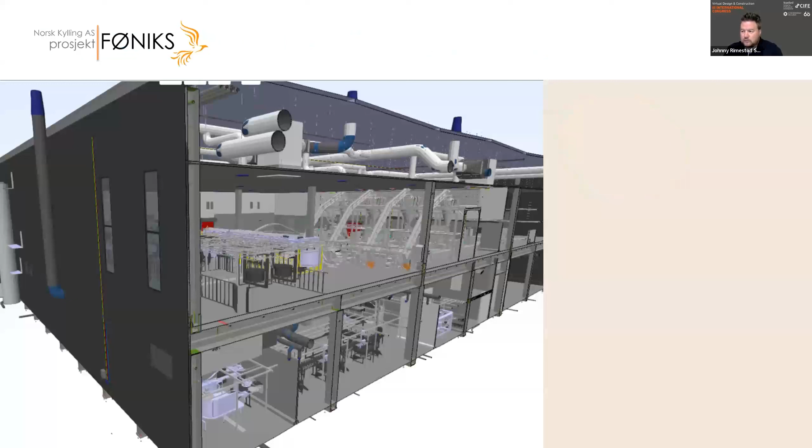We called this project Project Phoenix. It's one of the biggest greenfield poultry factories ever built in Norway, and it's a 2-story production building, which has never been done before because most food processing plants take place on one story or one level.

So here they wanted to save area and have production line equipment on 2 stories on top of each other. That led to a lot of new and other types of challenges to solve since it's never been done before.

Speaking of the objectives the client wanted at the start of the project, they wanted to be the best in the world. They wanted the highest quality of white meat and the lowest prices in Norway, and they wanted to develop world-leading solutions for energy and CO2 emission, animal welfare, and so on. Extremely ambitious objectives from the client when we came into the project.

As you can see, these objectives don't contain any targets or numbers that we can use to produce metrics to see if we're on course. They're really just saying we want to be the best, and have the highest and lowest.

So one challenge coming into the project was how we could contribute to achieving the client's objectives with limited influence in the project. The organizational map consisted of, I think, 13 or 14 sub-projects or sub-organizations. I was hired for the building design team, and we were only there to design the building itself, not the machines and equipment or anything else, just the building and the technical systems supporting the processing equipment inside.

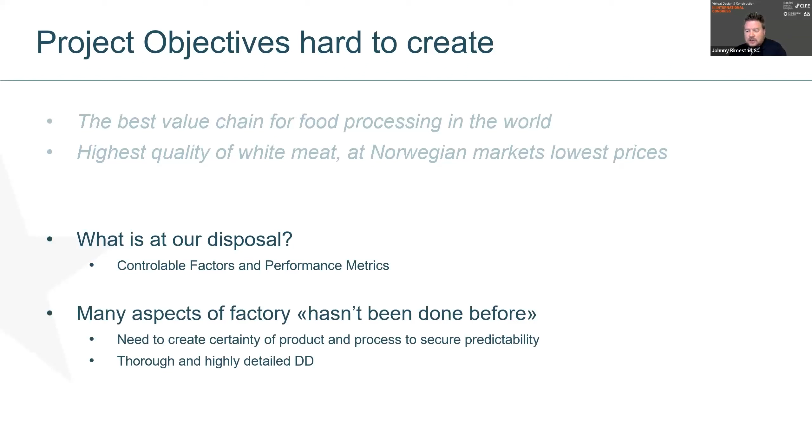The factory hadn't been done before, so we needed to create certainty of product and process to secure that this project was actually buildable. That required a thorough and highly detailed design development stage.

I'm not going into detail on the design development stage. I'll just show you a summary of it with what we call a 5D light, which consists of 3D geometry in BIM connected to schedule activities, connected to cost estimation. What I really want to show is what we did further on in the project.

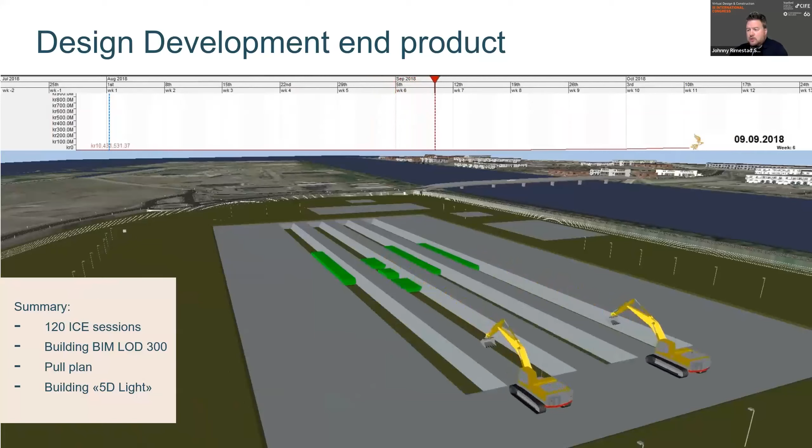In the design development stage, we ran 120 ICE sessions. We actually modeled the entire factory building and supporting MEP systems in BIM to an LOD 300. We used pull planning, and then created a 5D light as we went through the entire design, trying to figure out how to build this complex project.

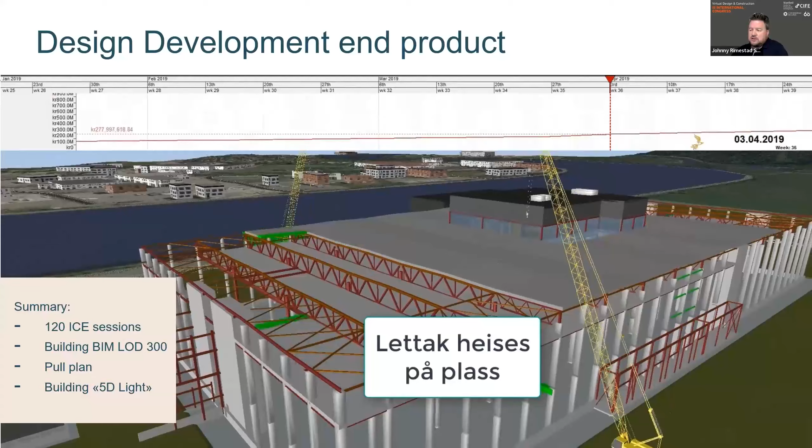So what you see is basically how we get a tight building envelope, and it's waterproofed. What you saw is a lot of building design stuff, walls, foundations and columns, but very little of machines and equipment. So basically we designed an empty shell. That was our task in our sub project. We were there to design the building and the supporting technical systems for electrical, plumbing, ventilation, and cooling, and so on.

However, in the design development, the end product, the CEO of the company, the client, they were really pleased with the result, and they said this 5D light presentation offered a precise, quick, and to the point message, which had a massive impact on such a complex project because there were so many stakeholders, and not many of those were used to reading construction documents or time schedules and so on. So this just really gave them 2 years of construction shown in 2 minutes. It was easy for them to understand. So that was what we did through the design development stage, among other things.

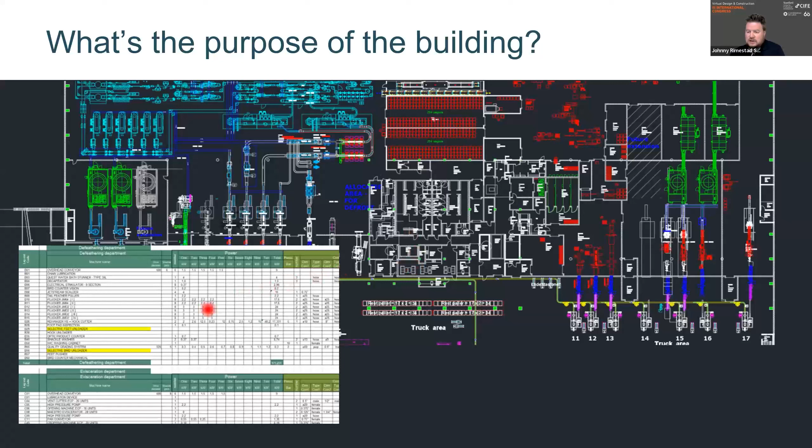It was quite challenging trying to understand both geometry and utility. All the machine suppliers handed in what we call a utility list, which is meant to have the name and number of the machines, which you are supposed to find in this drawing, and of course connect it to a data sheet they also sent. However, the biggest challenge is that the name of this machine is not always the same name used in this list, and the name on the data sheet is not the same either.

So it's full of contradictions, hard to understand. And also some countries and suppliers use metric units, others not. Some use PSI for pressure, others use bar, and so on. So there was a lot of confusion with units, and it was hard to design the mechanical systems for this project because we couldn't see and we couldn't understand.

There's zero information, so it's basically not a building information model. The file sizes are extremely big. Most suppliers won't even share their files because these are files made for production, meaning these files are made to actually build the machines. So they are 1:1 ratio.

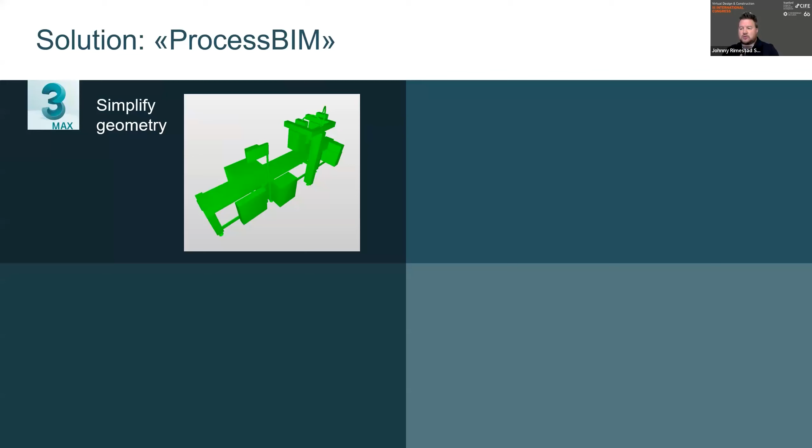So what we did, we created a solution. This is a short version. We took the 3D files from the suppliers and simplified the geometry, so we took away everything that we didn't need to design the building to support this machine. Nuts and bolts and all small details were just taken away. What we wanted is the outer geometry to see the geometry in X, Y, and Z, and basically where there are windows, where there are air, and where you cannot go.

We also standardized this utility list where people fill out the need for utility for this machine. All suppliers needed to fill out the same list. They could not come with their own sheets; they needed to fill it out in the standardized way. We also had workshops, and we created 3D symbols that we connected to these machines to say where do we connect cold water, where do we connect electrical power, and so on.

The biggest thing which made the biggest impact is we did this and we merged everything into one file. We merged the simplified geometry, the information from the utility list, and the connection points, and created everything into one BIM file.

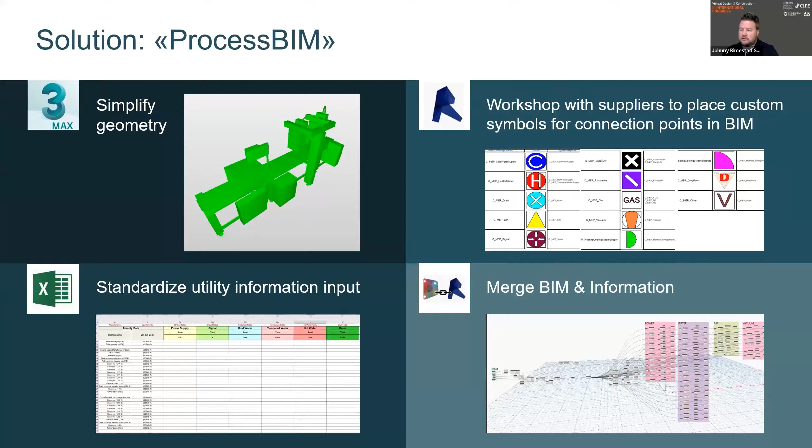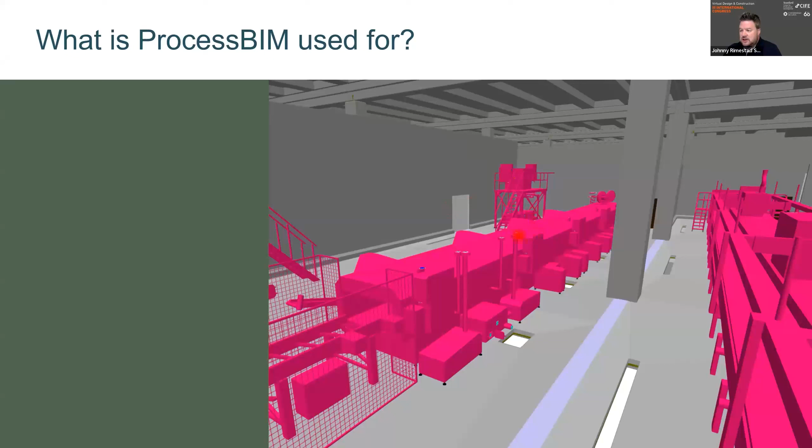So what did we use this process BIM for? We called this process BIM basically because it's BIM for the processing equipment - the end result where you have geometry, utility information, and connection points. So here you see some machines and you can see the connection points over here.

The process BIM was actually used as a contractual design basis for the MEP contractors. We worked for the client and created Revit files and IFC files that we gave to all of the contractors, clients, and engineers in this project. So they could just link this into their Revit models and model the utility supply. In this case, we knew that everything was taken care of - we knew all the utilities, and they could design the system so it actually supported what was needed.

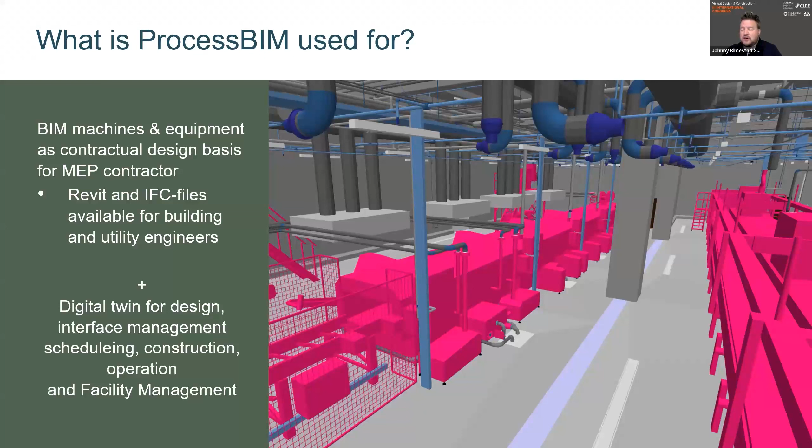We did this for the design phase, but it turned out this was a great tool for interface management, scheduling, construction, and also now in operations and facility management. We visited the factory 2 months ago and they say they still use BIMsync, still use all these files, and open the BIM every day because it's a big factory. Whenever they wonder something during operations or facility management, instead of walking 20 minutes, they open the BIM and go directly to see exactly what they need to see and all the information that goes with it.

I also want to show an example of how we could integrate information through BIM, because between the stories we found 7,700 BIM objects, and we needed to find which ones needed voids or core drillings, etc. That was a big challenge because not all of these BIM objects needed core drilling. So how could we use BIM to find out what to cut out?

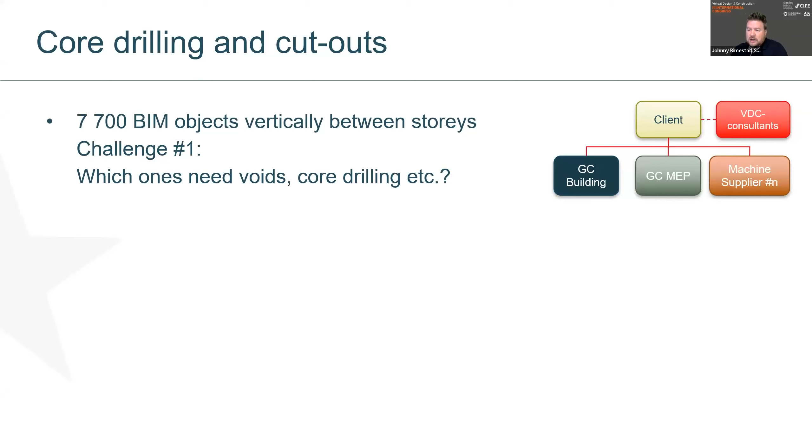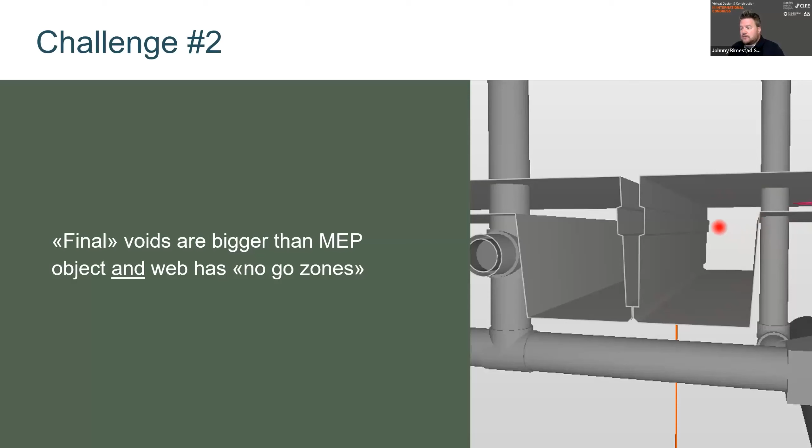So how can we find clashes that are not there yet? That was one of the biggest challenges.

Third challenge is that basically any opening in this structural floor represents a risk for the client. It represented a hygienic risk because if there was a leakage or containment issue between stories, worst case they had to shut down production, which would lead to a lot of time and schedule costs. The operation cost of a hygienic breach is extremely high, so we also needed to keep the number of voids to a minimum.

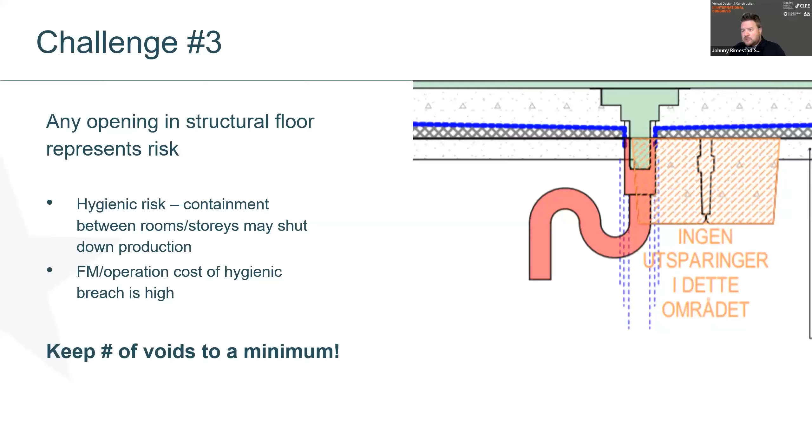So those were our three challenges. And we came up with a solution for this problem using the VDC framework.

We used Dynamo, which is a visual programming tool, to identify all BIM objects that penetrated the concrete. Then we exported it as a spreadsheet Excel file, which the people responsible for these voids could enrich with metadata—this object needs this tolerance, it has to have fire protection, it needs this, it needs that. It was all listed in a spreadsheet and the responsible people filled it out.

Then we took that file, turned it back into BIM, and used visual programming through Dynamo and Solibri to create new BIM objects showing the actual size of the core drilling. With this, we can run new clash detections to show this is going to be a problem. When we ran the clash detection, it would not give us a clash now, but when we look into the future, it will give a clash. That was a great discovery for us using this method.

We also used these BIM objects to collect coordinates so we could do surveying and layout directly from the BIM with the openings, and they did so on site.

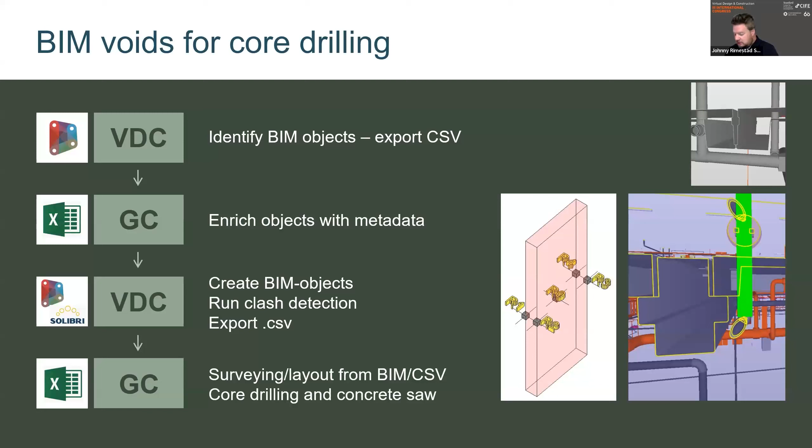I just took one of the screenshots of the BIM objects that we created. So we found 526 needs for voids. We were able to collect them and create shared voids, ending up with 366. Just one of these was misplaced—actually, not misplaced, it turned out someone had changed some of the design after we sent out the survey coordinates. But basically there were zero errors from this, and the people involved said that never happened before in any industrial project.

And you can see they're so rich and full of metadata—what file does this come from, what are the revision dates. Yeah, a lot of metadata coming in with these files.

So I want to show you what we call the process BIM, which is the processing equipment in 3D with information and connection points. Combining that with these automatically created voids, we could have a whole other level of coordination.

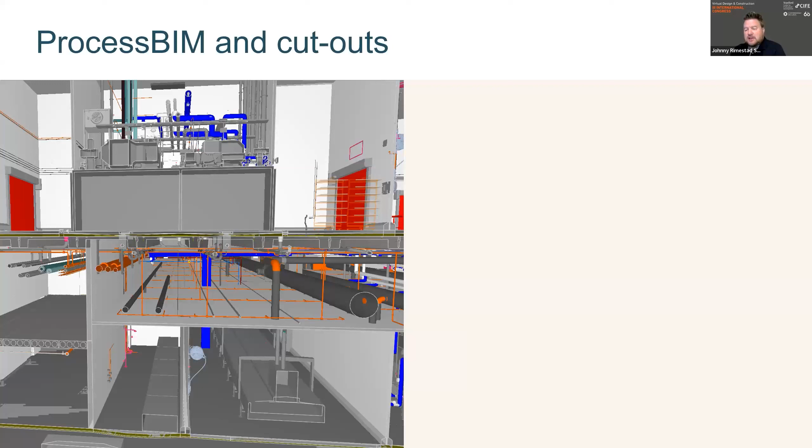It would have effect on the schedule and cost. And if we did not use VDC, did not have process BIM, and did not have voids, we would not discover this until basically the machines arrived and we saw there was no place for this. Then we would need to come up with a solution that no one really liked.

If you look at the people that would be involved in finding a solution if this is too late, you look at the general contractor for mechanical, electrical, and plumbing, the client side, the general contractor for the building, and also the machine supplier. Now, every one of these need to talk together to find the best way to place these machines after we already have done a lot of design and coordination work.

As you can see, this would be time consuming, both in terms of the calendar and schedule, but also hours, suboptimal design, and a lot of change orders and extra costs for the client.

Since we actually were able to detect this at an early stage and give notice to the supplier of this machine, they were now, on a contractual basis, ordered to redesign their machines internally so that they could move the wastewater outlet so it didn't clash with the webs of the structural floor.

So if you just think of how much this potential error could cost the client, and how many other similar issues like this would appear in the project, you can imagine the cost and time impact that would have. But since we already fixed it, there was no cost for anyone involved except for the machine supplier that didn't pay attention.

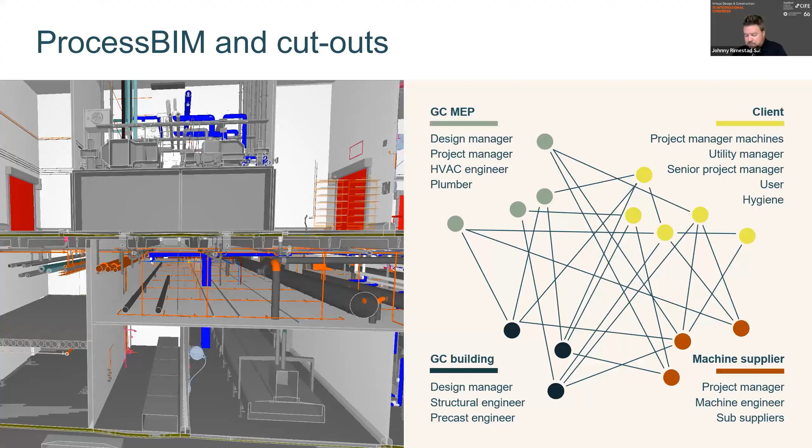So when the project was over, the client claimed they achieved all of their client objectives. And if you look at it through the criteria of a high performing building, a building needs to have objectives and criteria for how it is to be used, how it is to operate, build, and whether it's sustainable.

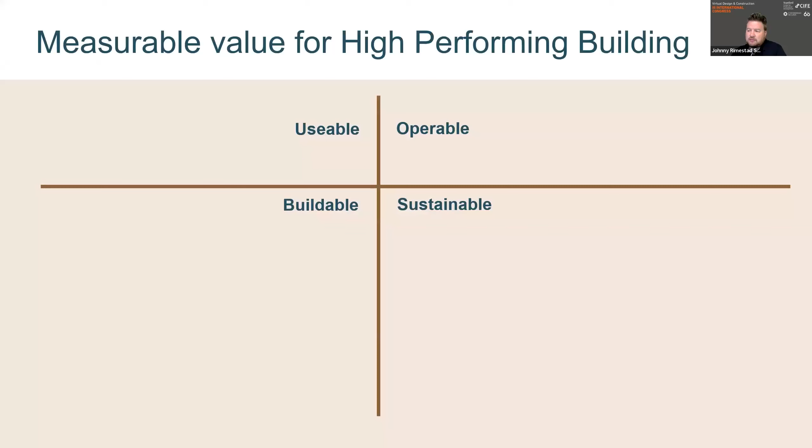These were not objectives that we had before we started the project, but if we now look at it in retrospect, you see that the project is a sustainable project. They've done a lot of innovation within energy, agriculture, and animal welfare. They actually produced white meat of the highest quality at the lowest price on the market.

They have zero CO2 emissions in operation, and a lot of awards they have won. For me, one of the biggest things that happened in the project, is that they actually came in on schedule.

They were actually 2 months ahead of schedule by March 2020, when COVID hit Norway at full impact. So they lost 2 months due to COVID, but that was basically from trying to figure out how to work from then on.

They did a lot of work on Microsoft Teams or Zoom, and they were extremely dependent on the process BIM and all the BIM tools and everything they had, because they basically had a digital twin of the product they were designing.

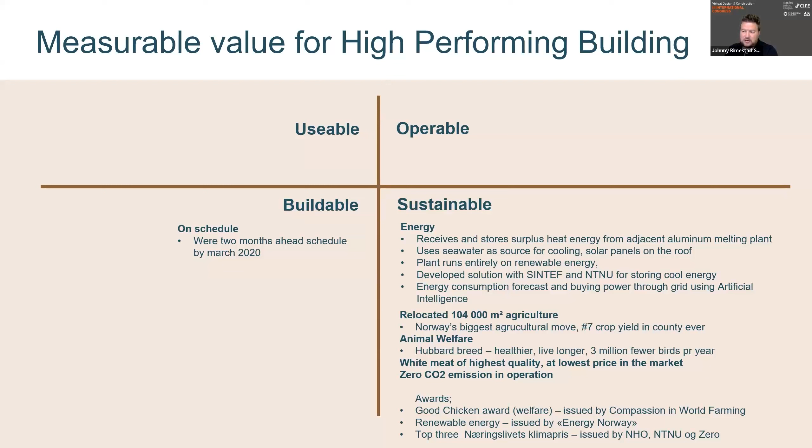They were actually also under budget because the good coordination in the project led to zero to none change orders. So they had a 10% contingency in their plan, and they were able to use it to create an even better building as they went along.

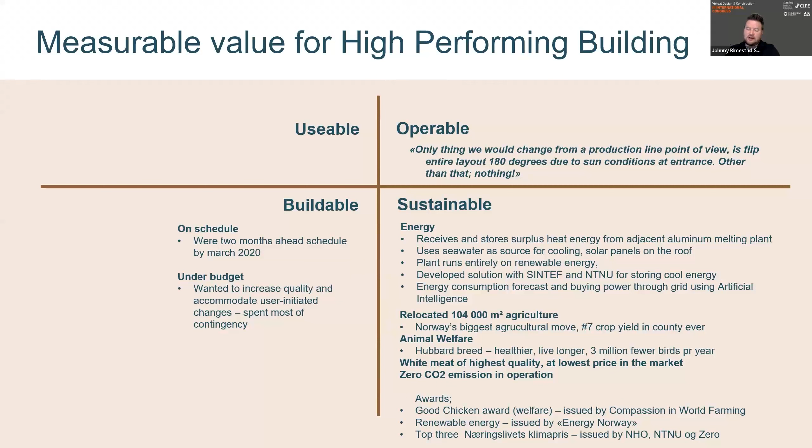During our visit to the plant, we asked, do you have any regrets about this project? What would you do if you were to do it again? And they actually said nothing, because since we had everything so visualized, there's not one thing that we would change, except flipping the entire layout 180 degrees due to the sun conditions at the entrance. But everything inside it was exactly what they wanted and needed.

So the CEO of the project said this is nothing short of unique, coming in on time and under budget.

And 10 to 15% over budget is not unusual. Other projects actually went 40% over budget. So this was quite extreme.

So we asked the key personnel in the project for the success factors. And when you look at those, they basically sum up things that we do with VDC. What was crucial to be on time and under budget is basically controllable factors: right people, right technology, deciding to work on thorough design development. And we would not be able to do this without the BIM process.

Even if you can apply VDC partially, it can help secure massive value for your clients. So I think I will stop there. I had a lot more, but I spent too much time talking, so I would stop sharing the screen.

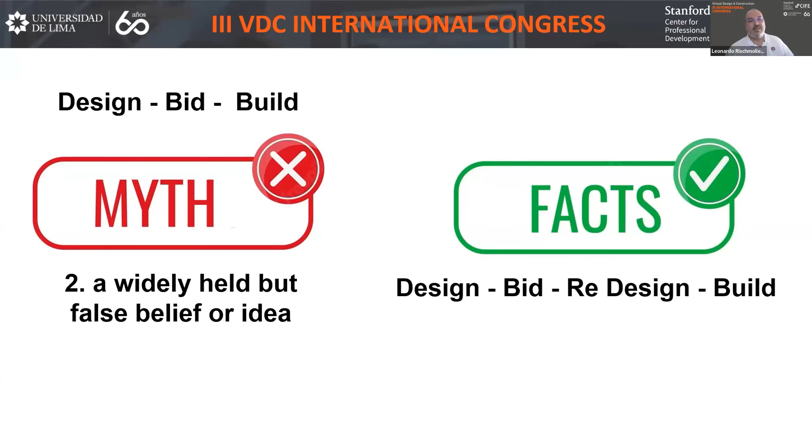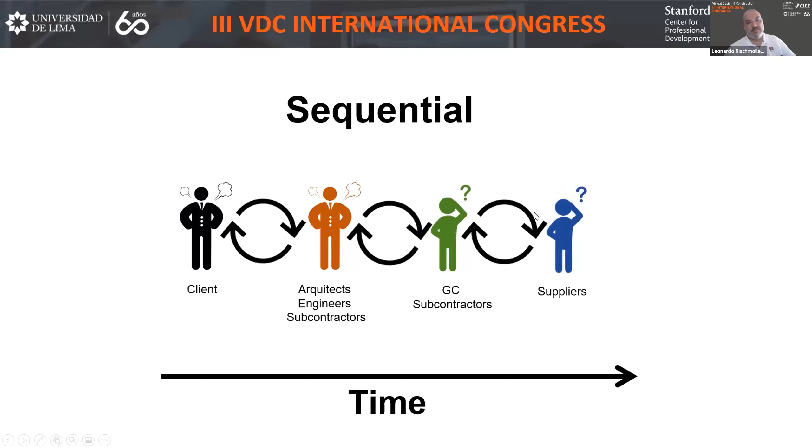Este proceso de diseño, licitación, construcción, o diseño, licitación, rediseño, construcción, tiene una característica importante: es un proceso secuencial. Tenemos a los arquitectos e ingenieros haciendo el diseño y solo cuando este está terminado pasan los planos al constructor. Pero la secuencia es más grande: tenemos al cliente, quien contrata a los diseñadores, y a los constructores, quienes contratan a los proveedores. Y además, en realidad, no es tan secuencial como se pensaría, sino que hay muchos loops de intercambio de información en cada una de las etapas, igualmente secuenciales.

Lo opuesto a secuencial es el trabajo concurrente. Lo ideal sería que, en lugar de esperar a que una de las instancias produzca la información, como planos, trabajar todos juntos en la creación de la información, de modo que no haya esta instancia de interacción en la cual tenemos que preguntar qué quisiste decir, hay un error, no entiendo, a través de los RFIs y las órdenes de cambio.

Entonces, lo opuesto al trabajo secuencial es el trabajo concurrente, y el trabajo concurrente no necesariamente es entre los actores que se ven en este slide, sino entre diferentes actores de acuerdo a la etapa de desarrollo en que se encuentra el proyecto.

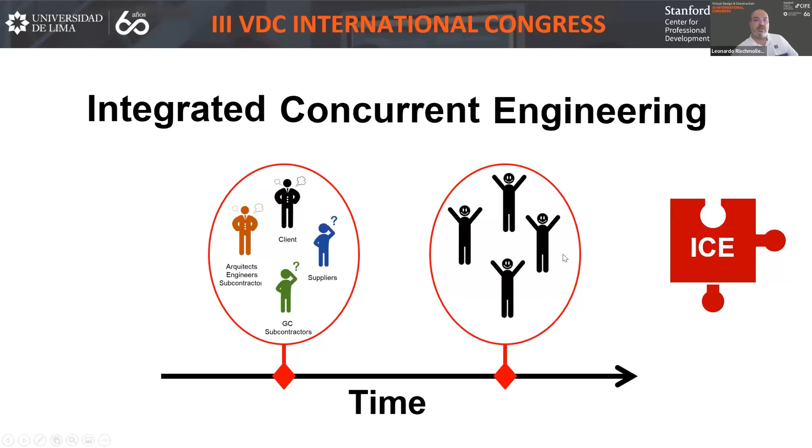Dentro del esquema, framework o metodología VDC, llamamos a este trabajo concurrente Integrated Concurrent Engineering, o ICE. Entonces, ICE es una pieza fundamental de este rompecabezas VDC que se refiere al trabajo concurrente de diversos actores en las diferentes etapas de desarrollo del proyecto. Así que tenemos una pieza de este puzzle de VDC.

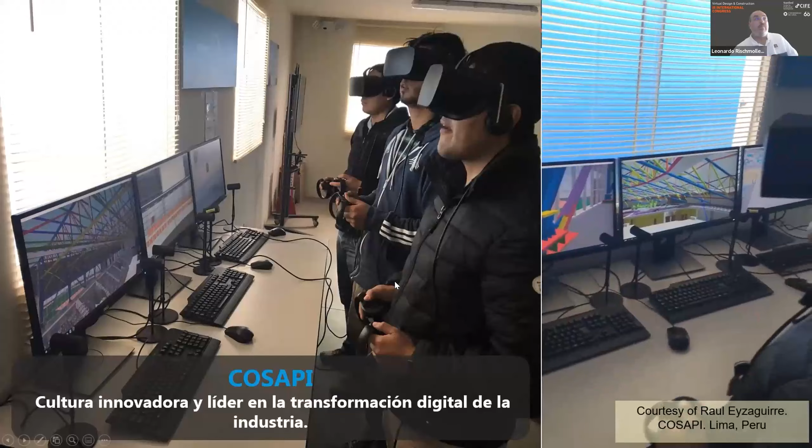La ingeniería concurrente integrada usa, no necesariamente pero prácticamente en la mayoría de los casos, Building Information Modeling. BIM es hoy en día algo común en la forma de diseñar los proyectos. Ya el AutoCAD quedó atrás, y hoy en día no hay proyecto que no se diseñe usando BIM en la mayoría de lugares del mundo. Pero BIM de forma aislada no es suficiente.

Hablamos de ingeniería concurrente integrada, en donde de manera concurrente diferentes actores, dependiendo de la etapa de desarrollo del proyecto, se reúnen para trabajar en la toma de decisiones, en la planificación y muchas otras actividades, utilizando la modelación BIM, pero también la metodología de ingeniería concurrente integrada en sesiones ICE. Estas sesiones, a propósito del trabajo híbrido, pueden llevarse a cabo de manera presencial, como se ve aquí, o de manera virtual.

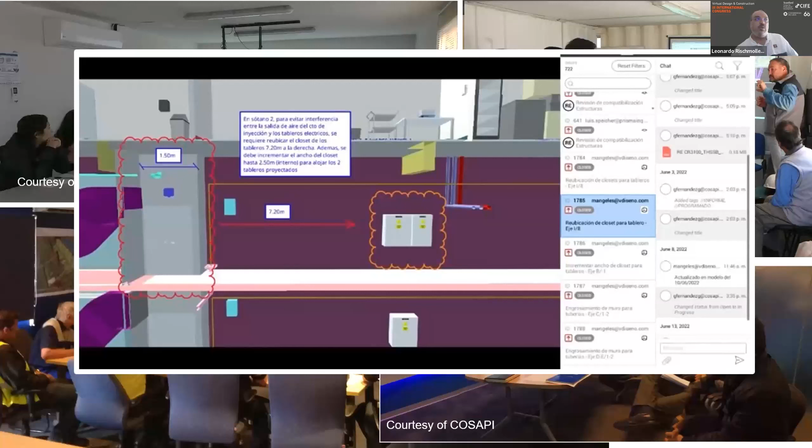Utilizando diferentes herramientas comerciales disponibles para ser adquiridas, en las cuales, en el caso de la herramienta que estamos viendo en pantalla, tenemos una parte de la pantalla con un chat tipo WhatsApp, y en la otra parte, en tiempo real, estamos visualizando los modelos BIM de todos los modeladores que suben sus modelos a las nubes y pueden ver la interacción de estos con las otras disciplinas.

Otra pieza de este rompecabezas VDC es PPM, que significa Project Production Management. Es la aplicación de la ciencia de operaciones a los proyectos, y fue desarrollado por el Project Production Institute. La ciencia de operaciones es la ciencia de los proyectos. Un mejor entendimiento de las ciencias de operaciones lleva a mejores operaciones y a empresas más exitosas.

Algunas de las cosas que se ven cuando uno se involucra en Project Production Management son los procesos de demanda, la utilización de recursos, la variabilidad debido a la aleatoriedad o falta de información, temas de sincronización y contingencias, trabajo en proceso, tiempos de ciclo, productividad, stocks, etc.

En términos simples, cuando trabajamos en la oficina tratamos de determinar qué y cuándo deberían hacerse las cosas, y esto responde a lo que conocemos como Project Management. El Project Management está fundamentalmente enfocado en qué se debe hacer, a través del alcance, y cuándo, a través del cronograma. Algunas veces también, a muy alto nivel, la utilización de recursos.

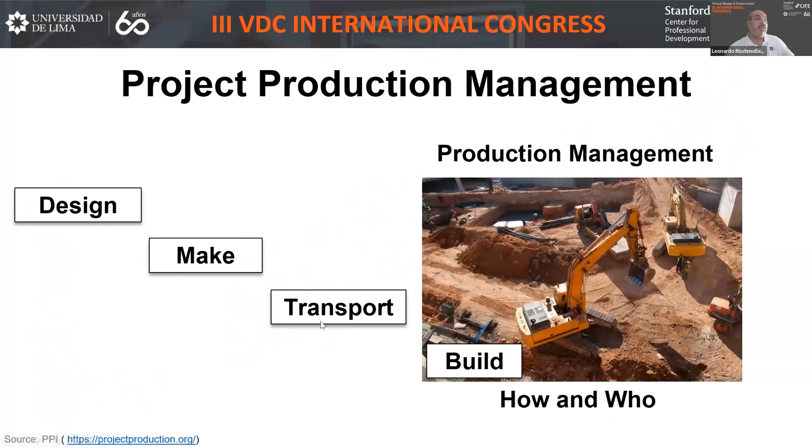Y cuando hablamos de Project Production Management, a pesar de que yo he presentado esto con foco en la construcción misma, en la operación, en realidad el Project Production Institute propone que hay 4 verbos con los cuales debemos lidiar: el diseño, la realización o fabricación, el transporte y la construcción.

Entonces, esto es lo que vemos dentro de Project Production Management como parte del VDC, además de 5 palancas importantes, que son el diseño del producto, el diseño del proceso, en donde lidiamos con el cómo, la capacidad, el inventario y la variabilidad.

Dos piezas más de este rompecabezas o puzzle VDC son los objetivos del proyecto y los objetivos del cliente. Muchas veces podríamos pensar que estos dos objetivos están siempre alineados, porque tendemos a pensar que el cliente lo que quiere es su proyecto a tiempo, dentro del presupuesto, con la calidad adecuada y sin ningún accidente, lo cual es cierto. Pero si vamos más profundamente dentro de lo que quiere el cliente, muchas veces encontramos que además del costo, el presupuesto, la calidad y la seguridad, los clientes tienen demandas específicas que debemos alinear con los objetivos del proyecto.

Para eso les voy a compartir un ejemplo de este proyecto en la ciudad de Lima, llevado a cabo por la empresa COSAPI. En este proyecto se está utilizando el rompecabezas o marco VDC. Yo quiero representar esto como un marco de gestión de proyectos que aprovecha lo mejor de todas las metodologías y herramientas disponibles: lo mejor de la tecnología y de las herramientas BIM, pero también lo mejor de metodologías Lean Construction a través de Project Production Management, y rescata lo mejor de las principales metodologías de gestión de proyectos, como aquellas propuestas por el PMI en su PMBOK.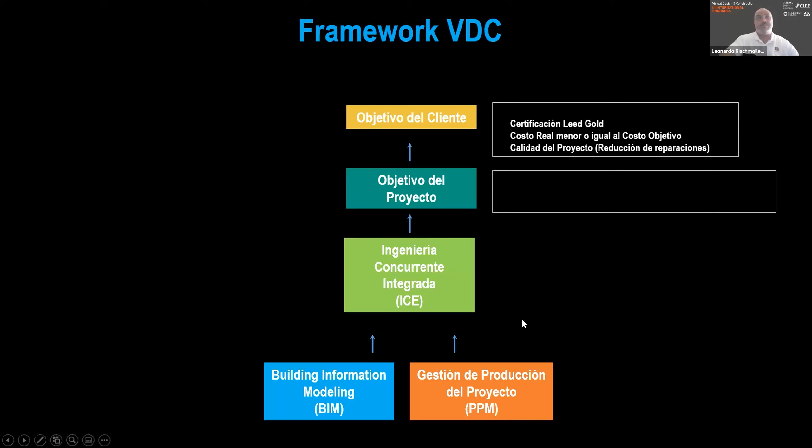Entonces, cuando hay un trabajo concurrente entre el equipo del proyecto y el equipo del cliente, se puede establecer una colaboración, una comunicación y una conversación que permita alinear el objetivo del proyecto con el objetivo del cliente, e ir más allá de pensar que el objetivo del proyecto es solamente acabar en plazo y presupuesto con calidad y seguridad. En este caso particular, obviamente, uno de los objetivos del proyecto es acabar dentro del costo objetivo o el menor costo real. Pero en ningún momento en el caso de los objetivos del cliente hemos visto todavía temas relacionados al plazo.

El cliente lo que necesita es tener aulas operativas antes de que empiecen las clases en el ciclo 2022, en el segundo semestre del año 2022. Cuando uno realmente conoce los objetivos del cliente, entonces puede trazar objetivos del proyecto alineados con los objetivos del cliente. En este caso, ¿qué pasó? En este caso, entregar aulas

Operativas para cuando el cliente las necesita. No es necesario entregar el edificio completo. Este edificio tiene no solamente aulas, sino tiene ambientes para otro tipo de uso. El cliente, sin embargo, lo que necesitaba prioritariamente eran las aulas. Entonces, al trabajar de una manera concurrente y coordinar con él, podemos determinar entonces que el objetivo del proyecto principal va a ser entregar las aulas en los pisos 4 y 5.

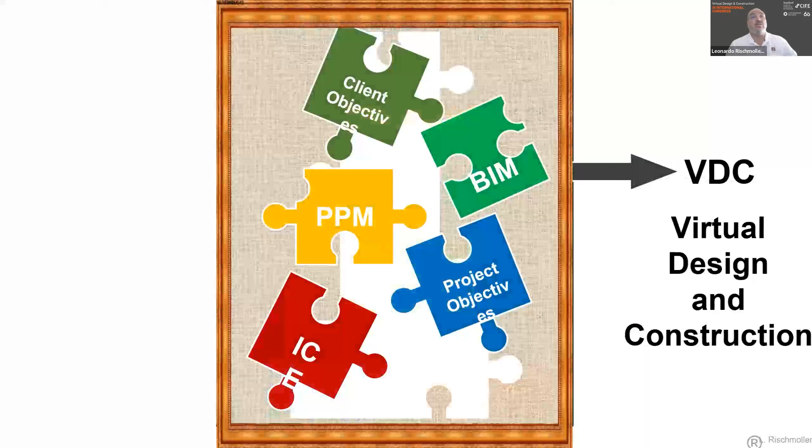Así que eso espero que sirva como base para lo que sigue en estos 3 días, y estemos todos alineados cuando hablemos de VDC, sepamos de qué estamos hablando. Muchas gracias.

Bueno, muchas gracias, ingeniero Rischmoller. Excelente presentación en la cual pudo comparar cómo es la diferencia, ¿no?, entre la teoría y la práctica real en los proyectos de construcción. Y bueno, explicando en el proceso el rompecabezas del VDC y su aplicación en un proyecto, ¿no?, de la constructora COSAPI. La pregunta nos las han dejado por el chat. ¿Cuál sería, en su opinión, la mejor estrategia para poder introducir VDC?

Lamentablemente, no voy a poder responder esa pregunta, porque dependiendo del grado de madurez que cada empresa tenga en el uso de herramientas BIM, por ejemplo, o de la etapa en la cual se encuentre dentro de su proceso de digitalización, cada empresa va a tener que desarrollar un camino diferente. Es bastante claro que hoy en día quien gatilla todo ese tema es BIM. Lo importante es no quedarse en BIM, sino comprender que BIM es algo que puede ser enmarcado dentro de un contexto más grande. En este caso, el contexto más grande es VDC.

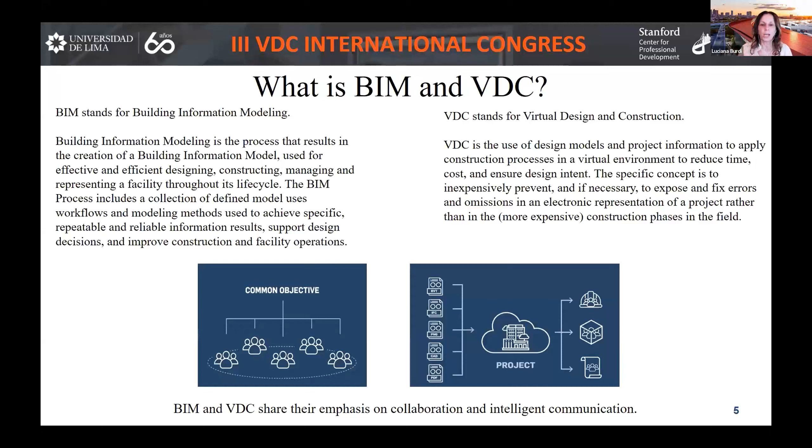There is a big difference between BIM and VDC. For Massport, BIM is really the technology—BIM is the model in some way. VDC, the Virtual Design and Construction, is the process of implementing it, when we include lean delivery, lean design and construction, and the last planner system.

We see the benefit in many areas, and we're trying to push very hard on all 3 facets. The design and construction buckets are really within my department—we develop and manage them. For operations, we have to educate our facility managers to actually be able to use the model to manage their facility.

We are not there yet for the operation, because we have electricians that hardly use an iPad, and we ask them to actually look in 3D. Obviously, you need a very educated owner to be able to take the model all the way from design to construction into operation. The design benefit is obviously high quality.

We've seen this. We've been implementing this since 2012, as mentioned. So we have used, at least for the past 10 years, BIM both in design and construction. So how do we make sure that this project gets implemented?

This is a particularity of Massport, and this is a document that I developed in 2018. At the end, there are a lot of things we can do with BIM, a lot of things we can do with VDC, a lot of lean tools we can use. But the ultimate intent is to deliver success.

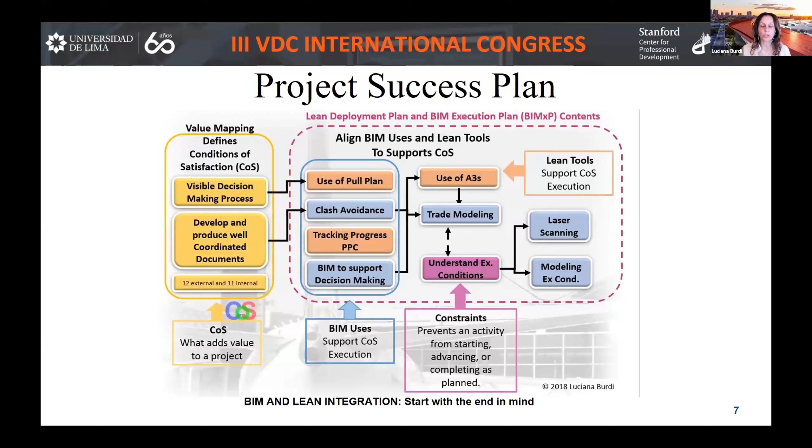So we try to identify also the constraints that will impede any major project from being successful, and how BIM and Lean can help support and achieve this project.

Some of the projects, I'm going to just highlight a couple of projects that we have been implementing. I'm just tracking my time. Obviously all our projects use BIM, VDC, and Lean. There is no option.

Terminal E is a project that's going to be opening next summer. It's a $660 million project, adding 4 gates to our international terminal. So if you come to Boston after September 2023, you will be landing in this terminal. The image behind me is basically the image of the terminal you're seeing.

There is a lot of technology in the project, a lot of new and improved technologies. It's LEED gold, apologies, not LEED silver. We also have Onyx, the Onyx photovoltaic glass. So it's a high performing building.

At the same time, we had to use technology. We had to use BIM to do daylight analysis, to do a natural daylight analysis model, to make sure of rainwater analysis modeling. You can see in this image here, our subcontractor used the model. The roof is very specialty.

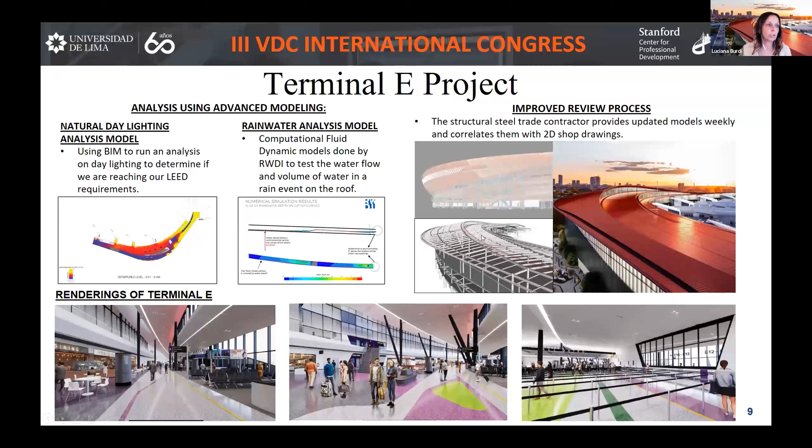Luis Vidal is the Spanish architect who actually designed it. It's a very complicated building, so we had to use a very advanced subcontractor to be able to model the structure from every perspective.

Similarly, there is another project. This project is going to open in 2 weeks, actually next week. It's the connector between 2 terminals. Even here, there is a lot of technology involved in this project.

And also for this one, we used big room collaboration, which is a Lean approach, where you bring the model and it gets projected on this massive screen, and communication is done around the model. Again, this goes back to the point that we're doing a model-first approach, where the model becomes a substitute for the drawings.

At the same time, we use other types of technology, like Mural, as a way of doing all this. This project had to go through the pandemic, and we did not stop the design and construction.

So we had to reinvent how we work with technology. If you are familiar with pull planning and value stream mapping, you need to be able to put things on the wall and be highly interactive. So we use technology like Mural to replicate the interactivity that is needed in these big projects.

Same thing, we use throughout every project scan-to-BIM. So we laser scan every building. We do laser scanning to track existing conditions, but also once the project is built, we actually do laser scanning to produce as-built documentation at the end.

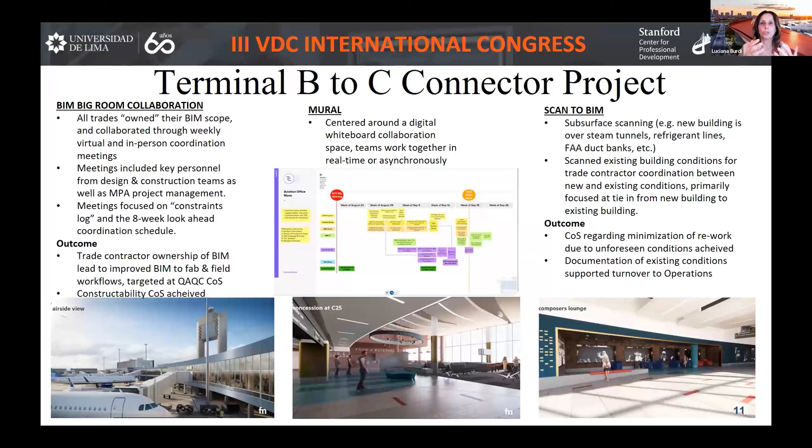The last project I want to show you is the roadway. We are doing a major $270 million roadway construction around all our terminals. If you're familiar with our facility, we are very close and very tight.

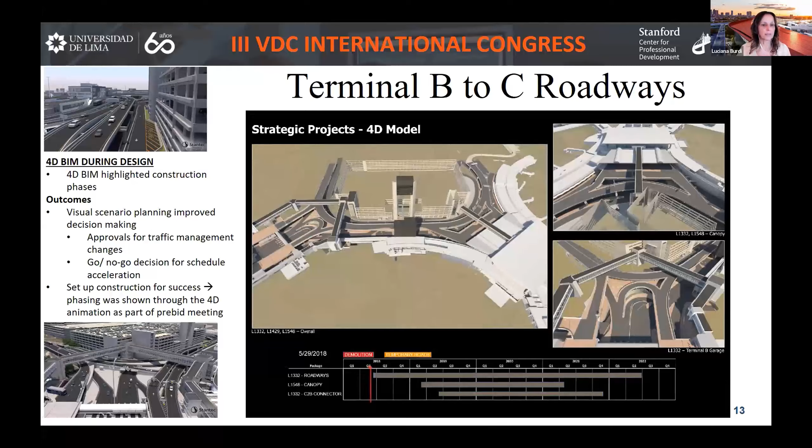This is just the last slide. The model-first approach is becoming fundamental for us to be able to deliver projects on time, on budget, delivering value to the client, who is our aviation authority and also our airlines, who have tickets to sell, similar to colleges and universities. They have to deliver because they start selling tickets much before, a year in advance of when the project gets completed. So the designers, everybody is incorporated, connected, and works together to make sure that this collaborative environment and VDC becomes the platform where excellence really gets elevated.

Something we would love to do, but our regulations do not allow, is IPD, integrated project delivery. So what do we do? We try to take some approaches from IPD and incorporate them into our contract. Because of our contracting, we cannot have a 3-party agreement, but at the same time we can take elements of this highly collaborative approach and include them in our delivery.

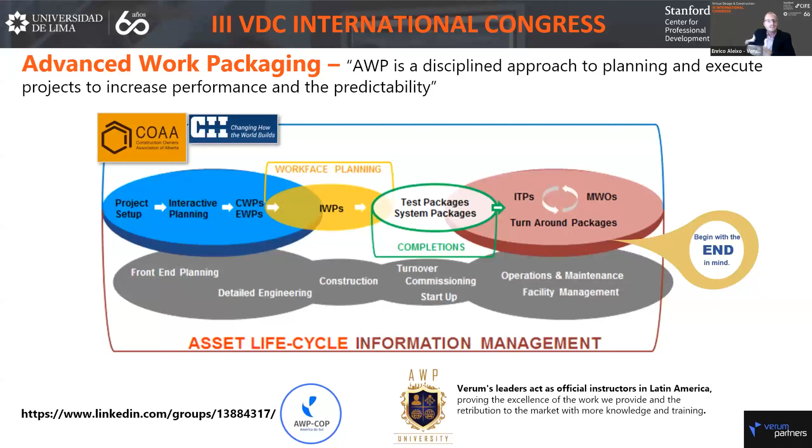There are two special things about advanced work packaging. First, you have to break the project into packages of scope—at first bigger packages, then break it down smaller. Second, you have to think and plan thinking on the end: begin to plan thinking on the end, on the need for operations, on your time to market needs, and then you unfold the strategy and the schedule on those marks.

Now we'll make a mental exercise, breaking this project into packages that are very core, very essential to the advanced work packaging concept. So you have a plant, usually a subsection of the project or even the entire project. You at first break the plant into construction work areas, which are big areas, mainly a geographical division of the plant including all disciplines, except for cables and underground, which have specific construction work areas through the project. Mostly that's because there are specific needs for cable and underground planning. But you have the plant, and you break it into several construction work areas at first.

Then you take the construction work area and break it further into construction work packages, thinking on construction first. The construction work package has these characteristics: it has more or less 40,000 hours of work in the field, and it is disciplinary—so I must have a construction work package for steel, another for piping, another for electrical, another for mechanical or equipment. In this order, a construction work area will be formed by several construction work packages. And here comes the magic.

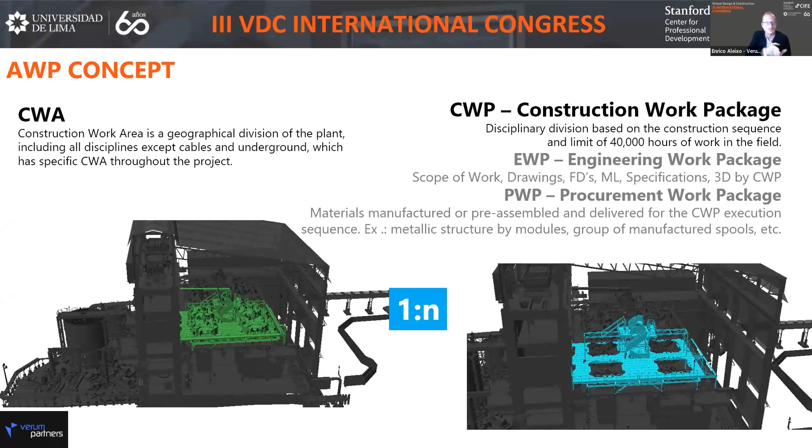One construction work package, CWP, is mandatorily related to an engineering work package and to a procurement work package. What that means is that in order to construct, in order to deliver that scope, I have some engineering activities and some procurement activities related to that construction scope, and this shall be constructed into the schedule.

Going a little further, the construction work package, the engineering work package, and the procurement work package shall be detailed further. But this detailing comes in an agile mindset, in a fluid manner, where the owner of the project, the owner of the plant or building, doesn't need to worry about the installation work packaging or the detailing of the construction work package. This level of detail belongs to the contractors, to the engineering, to the suppliers, on how to implement the construction work package, the engineering work package, and the procurement work package.

But we must foster, we must help the contractor as well, the engineer, the detailed engineering or the suppliers, in order to give, first, information, and second, the materials, the deliveries, or the execution of the construction to obey the sequence of the CWP established on the schedule.

So the installation work package is a subdivision of the construction work package that can be performed by a team free of restrictions—we'll talk a little later about restrictions—in a period of 1 or 2 weeks, with a total effort of 1,000 hours. So this is how we must teach the contractor to plan the installation work packages in order to fulfill a construction work package. And in a similar way, we have to drive the suppliers and the engineering to deliver models and materials to fulfill the engineering work package and procurement work package.

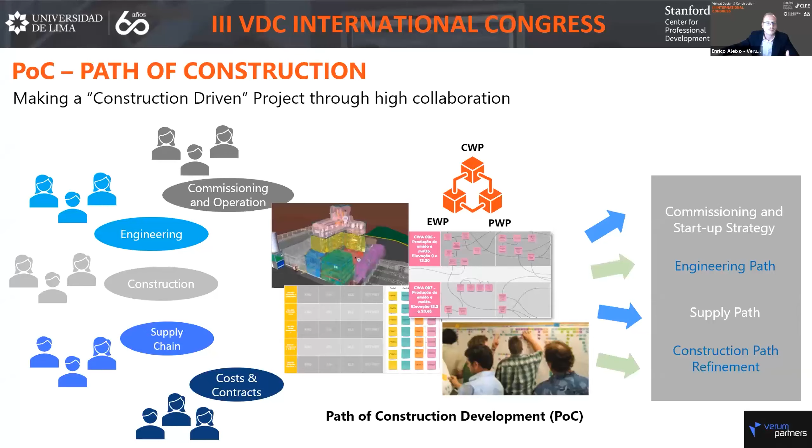Let's discuss a little further about how to plan for the end. This is an example, an illustration of the second main feature of AWP, that is to begin planning with the end in mind.

This is a mining plant, an example of one of our projects. We have here to minimize the time to market needed for the plant. The overall strategy here, when we set the priorities of those mining lines, was to minimize the time to market needed for the plant.

And this affects the overall strategy of the path of construction sessions. All the path of construction will be subordinated to that. So it's very important to think your overall strategy to time to market, in this case for commissioning the lines, the startup and process lines.

It is very nice to see how this works when you have to think, for example, on reducing the need for interface and how this affects safety, risk of accidents, when you have to ramp up a line with the other line still in construction. This is a very interesting exercise. But once the overall strategy of the project is set, the overall strategy for planning the project has to be subordinated to that.

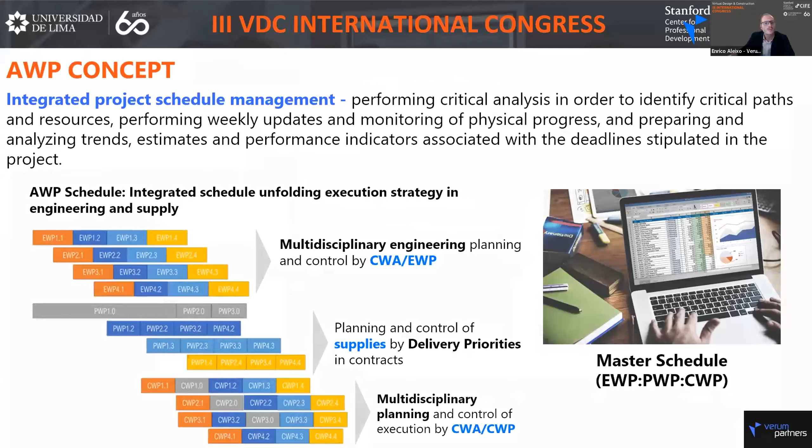We shall talk here about how the construction work package unfolds into an integrated routine on field, on site. So to execute and manage construction, you have to detail the construction work package into installation work packages, as I said before.

Reading the schedule, we build up a backlog of construction work packages. That backlog, you shall look at it first on a 3-month look ahead, the 3MLA. You take the next CWPs for 3 months, and you have to look for the restrictions on information, on engineering, on supply that are still present for constructing, for starting that CWP.

Once they are resolved, you approve the CWP for pull planning. That pull planning comes on a workface planning that breaks the CWP into installation work packages. And now you shall look further, detailed inside the installation work package as a backlog, formed on a 6-week look ahead time frame to remove the restrictions for the installation work package.

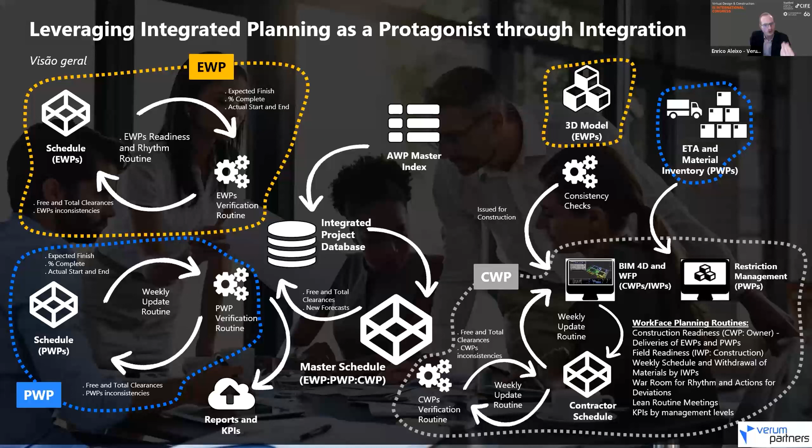So this is an example of how to attack materials management on the advanced work packaging and information management perspective. Construction work areas are detailed in construction work packages, right?

So I shall expect from my engineering the emission. For this example, I have 3 models, 3 different work packages. Those models on the building information modeling perspective, the takeoff of those models gives us the bill of materials for materials management. And in a materials management perspective, I shall do the expediting of materials and the site management, the inventory management on a materials management software, but looking after the completion of the construction work package.

On a construction and workface planning perspective, I shall take this model at the construction work package level and detail it further into installation work packages using what we call the real BIM 4D. For us, building information modeling 4D is not just about controlling, it's not just about painting a model, but it's to use the real information inside the model, the real information of a high quality modeling and engineering to planning and programming construction. So this planning, this programming of installation work packages integrates with the material management information, and the installation work package now has how to be resolved.

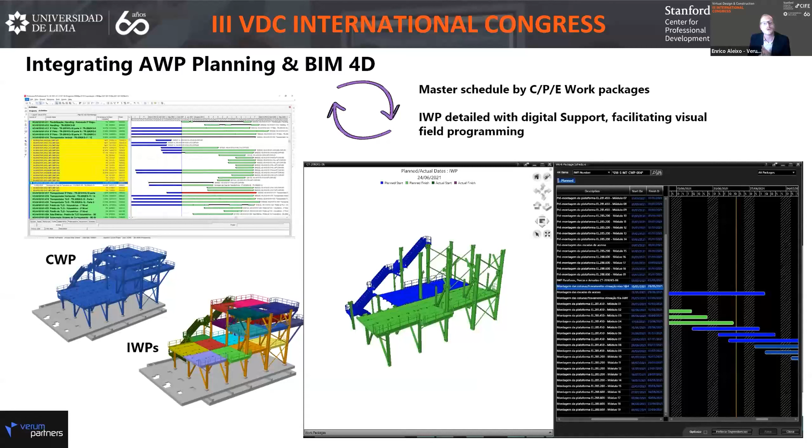We have seen some benefits on adopting advanced work packaging from CII. Those are some figures, and from various partners we have seen a down time in engineering time. We have seen an increase in engineering quality, in materials accuracy and productivity from civil works and from electromechanical assembly productivity as well. I will finish quickly on some thoughts on how VDC and advanced work packaging have synergy.

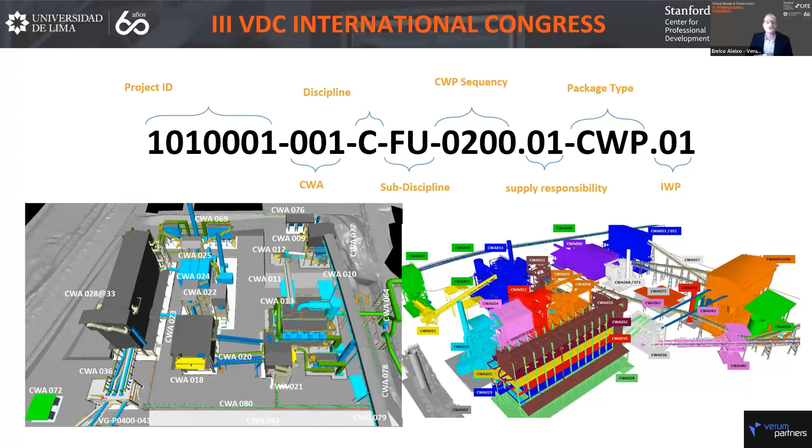It is fundamental for advanced work packaging that everything be codified in a scope matter. So I bring here an example. Every material, every asset on the model, every asset on any information object has to be codified. And this, of course, helps a lot on integrating the several stakeholders, the several deliveries we have on those kinds of projects.

Codification is a natural digital integrator. When we talk about integrating several planning schedules, several models, and adopting a Last Planner System on the contractor, as we brought to you earlier, we truly believe codification is a main feature as a digital integrator, and that talks very closely to some of the VDC aspects, right?

And at final, we see the synergy. It builds up as an integrated management for effectiveness and technical excellence. Both methodologies talk about execution strategy as a construction-driven strategy, right? But advanced work packaging is more about how to break your project, and how to develop VDC. VDC would be more like a 'what', a thinking and strategy, and AWP marries perfectly with VDC on that synergy, bringing work packages as value in a production line.

Both leverage digital information and consistency, and a leverage of BIM, right? BIM 4D, the real BIM 4D. And at final, I would say both especially leverage collaboration as a core value. As on the path of construction, it is impossible to set a good path of construction without collaboration of all stakeholders on the game.

Es importante que un profesional relacionado a la industria aprenda esta metodología porque principalmente es una metodología que da resultados con ahorros de plazo, ahorros de costo en los proyectos, cumplimiento de la calidad y clientes satisfechos.

El programa VDC es de alto nivel académico. Tiene una duración de 8 meses, iniciando con una semana introductoria presencial, en donde se comparten teorías, conocimientos, se hacen talleres grupales y también los mentores y docentes comparten experiencias de aplicación VDC real en los proyectos.

Además, posterior a la semana introductoria, cada alumno aplicará VDC en sus proyectos, siendo guiados por los mentores VDC del programa. En la mitad del programa y hacia final del mismo vamos a tener experiencias integradoras, espacios en donde vamos a poder integrar conocimiento, buenas prácticas, indicadores para consolidar y afianzar el conocimiento de todos los alumnos.

Vamos a tener también la oportunidad de viajar a Stanford para vivir una experiencia en la misma universidad. Los invito cordialmente a que sean parte de esta cuarta edición del programa VDC organizado por la Universidad de Lima en alianza con la Universidad de Stanford.

Ser parte de este programa VDC no solo te permite adquirir conocimientos y prácticas innovadoras, sino también ser parte de una comunidad VDC global.

La plana docente está compuesta por profesores de la Universidad de Stanford que aportan con su experiencia académica. Así también tenemos mentores que tienen experiencias en proyectos a nivel nacional y regional.

Desde el día 1, los alumnos empiezan un networking importante que los vincula tanto con sus compañeros de certificación como con los mentores del programa.

Así también, de manera opcional, se puede desarrollar un networking internacional a través de las visitas empresariales que se realizarán en un futuro. El programa te brinda una doble certificación, tanto a nombre de la Universidad de Lima como de la Universidad de Stanford. Asimismo, te permite pertenecer a una comunidad de certificados VDC a nivel nacional e internacional.

Gracias, Jennifer. Y ahora compartiremos con ustedes las experiencias de 3 certificados del programa internacional VDC, en el cual nuestros participantes han aprendido y han sido asesorados a lo largo de 8 meses sobre la implementación de la metodología VDC en diferentes tipos de proyectos.

Nuestro primer certificado es Mario Mendoza, vicepresidente de operaciones en Vesco, Perú. Y bueno, a continuación les mostraremos un video acerca de ello.

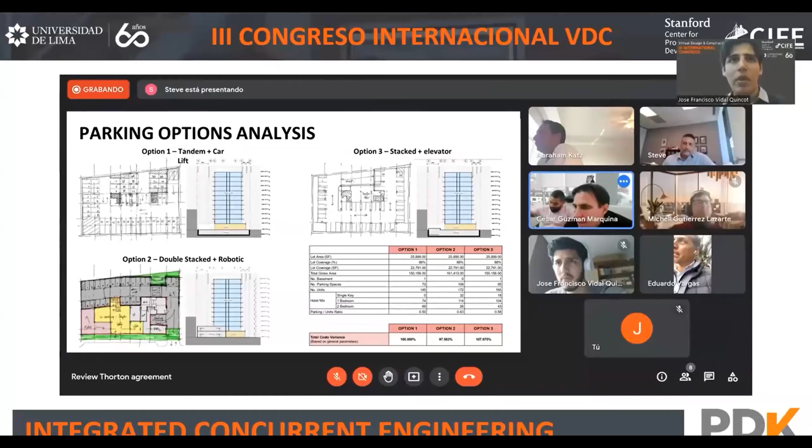Pero antes de hablar de cómo analizamos estas alternativas, vamos a hablar sobre el Building Information Modeling. Como he comentado, modelamos las principales componentes que existen en el diseño conceptual. Todo lo que puede existir en el diseño conceptual otorgado por el arquitecto lo modelamos para poder brindar cierta información y en base a eso poder trabajar siquiera con algo. Porque podemos trabajar con la información que se nos dé a un nivel conceptual, pero esta nos puede dar información valiosa, ya sea como los metrados y en consecuencia el costo que pueda otorgar cada una de estas partidas.

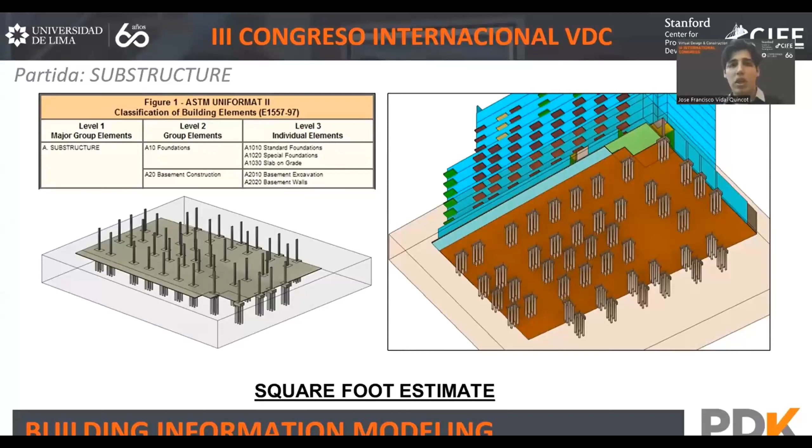Y bueno, como he comentado, en el caso de las estructuras, hemos incluso propuesto una cimentación sin tener estructuras por el momento, en base a la estructura propuesta por el arquitecto. Se ha también estimado el costo de estas en base a la estructura de presupuesto de Uniformat 2, que es una de las buenas prácticas también propuestas por el AACE, la Asociación para el Avance de la Ingeniería de Costos. Y en base a eso también se ha evaluado el tema del casco de estructura, también en Uniformat 2 y con la estructura propuesta por el arquitecto.

Dicho esto, las alternativas de diseño que se han evaluado: en primera instancia tenemos la alternativa de parking, la cual fue fundamental debido a que definió un punto importante del proyecto. Y es que, como se ve en el cuadro, teníamos 3 alternativas de parking y finalmente se escogió la alternativa número 2, la cual justamente era la que no tenía sótano.

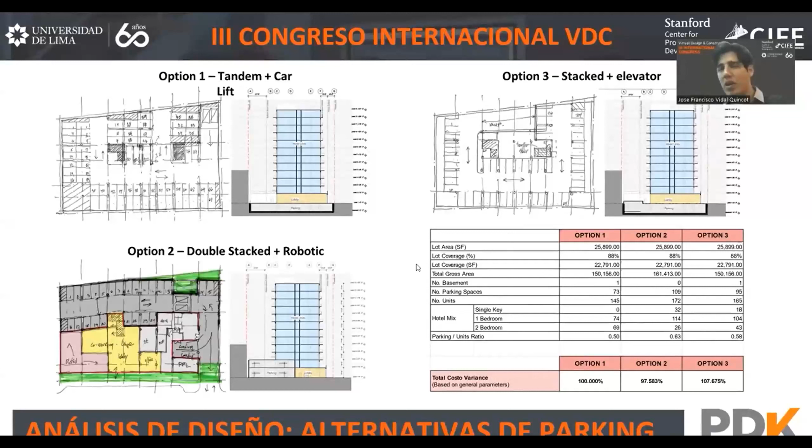Porque en un primer momento el proyecto iba a considerar un sótano, el cual iba a tener el estacionamiento, el parking. Pero en base a este análisis tanto de área como de lo que costaría el sótano, se pudo evaluar y concluir que la mejor alternativa era la que no tendría sótano, es decir, la opción número 2, la cual tenía un 97% de costo en base a la opción 1, que era el punto de referencia para este análisis. Entonces, como se puede ver, se pueden tomar decisiones importantes del proyecto desde etapas tempranas con el análisis de alternativas de diseño.

Asimismo, también se ha podido evaluar los tipos de muros para cada uno de los ambientes del edificio, consultando con especialistas que nos han podido brindar y facilitar cuál sería el mejor tipo de muro o drywall para cada uno de los espacios de este proyecto, los cuales han modelado, y finalmente se ha obtenido un metrado y en consecuencia un costo referencial para cada uno de estos.

Finalmente tenemos el análisis del mix de unidades, y es que para el cliente resulta fundamental poder encontrar la mejor combinación de unidades para cada planta del edificio. Es decir, para la planta otorgada, qué cantidad de unidades y de qué tipo sería la que genere mayor rentabilidad en base al área vendible que se tenga.

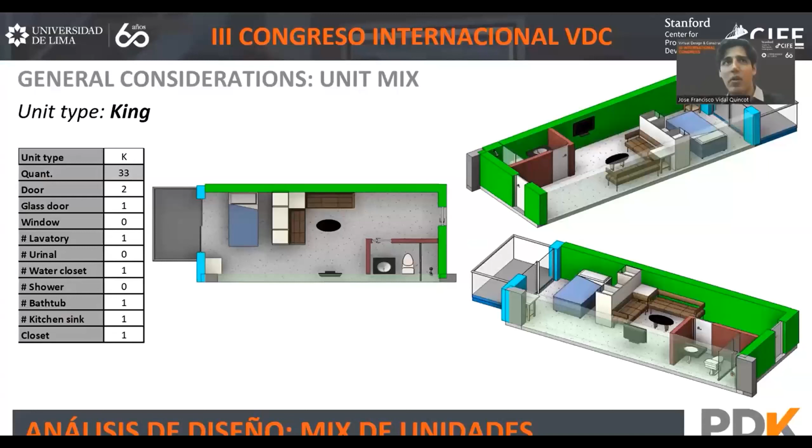Acá tenemos el tipo de unidad tipo King, que es como una suerte de estudio pequeño; One Bedroom Suite, un poco más grande, con un cuarto y un baño; y finalmente One Bedroom Suite plus Den. El Den es como una especie de cuarto pequeño para un escritorio o para otros usos.

Pero bueno, dicho esto, vamos a volver rápidamente al proceso para poder resumir un poco todo lo que hemos dicho. En base al diseño conceptual que se nos ha otorgado, vamos a modelar los componentes, consultar con los especialistas cuáles serían las optimizaciones, y analizar con ellos en una sesión ICE de manera integrada cuál sería la más óptima en base a costo y valor.

Vamos a elaborar un cuadro comparativo para el cliente, el cual va a tomar la decisión final, y en base a esta decisión se elaborará un nuevo costo meta, un costo meta actualizado para el cliente, el cual lo va a ayudar para poder evaluar la rentabilidad del proyecto que él espera.

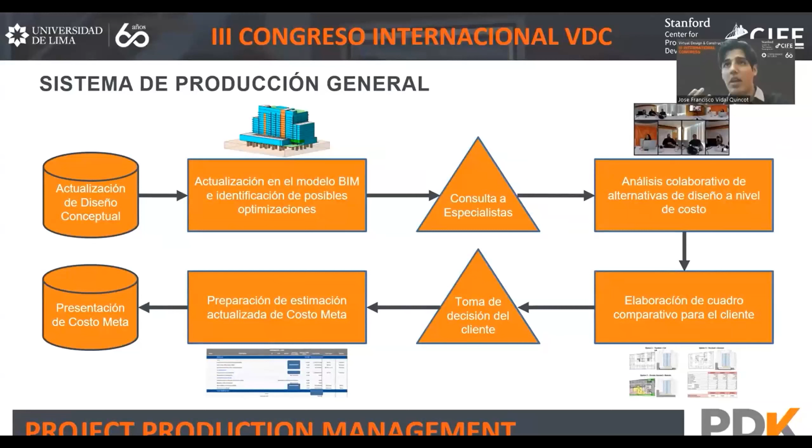Entonces, bueno, dicho esto, volvemos rápidamente ya para finalizar al marco VDC, que es todo justamente lo que hemos hablado. Ese tipo de implementaciones son importantes porque nos ayudan a entender que se puede plantear, sin mucha información y sin muchas especialidades de por medio, desde etapas tempranas, un poco cómo es que va a marchar el proyecto en términos de rentabilidad. En base a esto ya podemos ir sumando especialidades, integrando involucrados, con una cierta base: estructuras, instalaciones, que es justamente el siguiente paso para desarrollar el proyecto de la mejor manera, no solo para tener un diseño más adecuado, sino para tener un costo meta más preciso, que es justamente el objetivo dentro de esta etapa de preconstrucción.

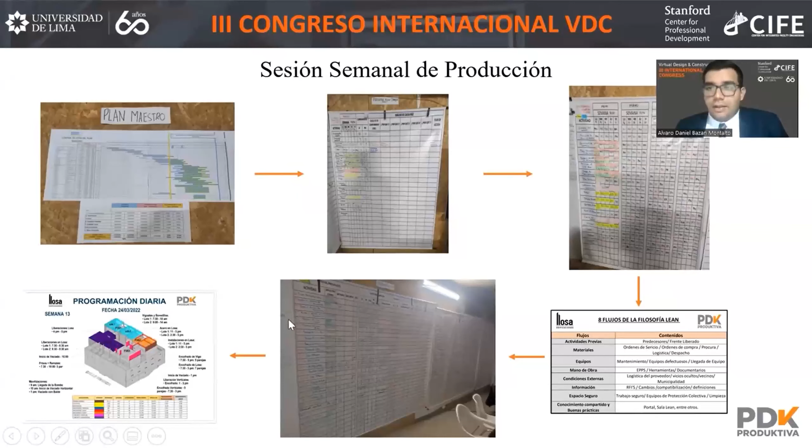Con respecto a otras métricas del proyecto, el porcentaje de planes validados fue del 100%, ya que se ejecutó la totalidad de los planes mostrados al inicio, y en conjunto se definió la totalidad de las normales tecnológicas.

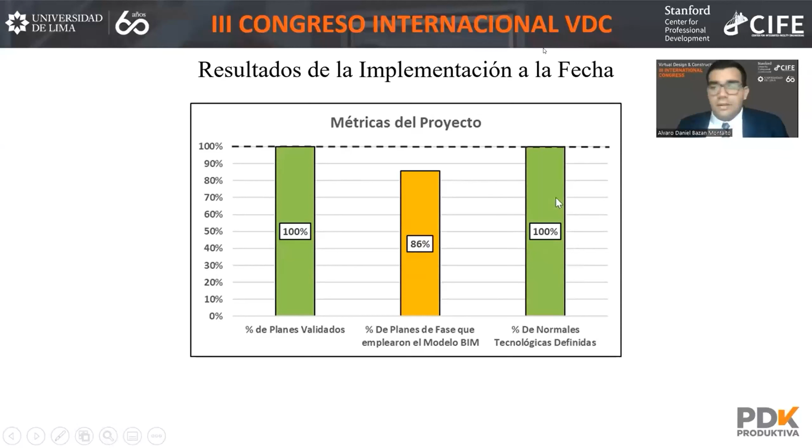Estas normales tecnológicas, al estar validadas por los encargados y demás gerentes del proyecto, están respaldadas y avaladas como logrables para ellos, lo que nos da un poco más de fiabilidad en el proyecto.

Eso sí, no se pudo llegar a utilizar el modelo BIM en todas las fases, ya que el modelo con el que contábamos no tenía el detalle de los detalles constructivos finales. Lo vemos como una oportunidad de mejora para un siguiente proyecto, ya que podríamos implementar el modelo también en la fase de acabados secos, que no se pudo ejecutar.

Como conclusión, el VDC es una metodología viva, y en este proyecto se vio el beneficio de entender bajo esta metodología la planificación de las fases, ya que nos permite integrar a los distintos involucrados y hacerlos parte de esta planificación. Eso genera compromiso.

Y también nos da más confiabilidad de nuestros plazos, ya que no es una programación hecha por uno sentado con un Excel, sino una programación validada por todos los miembros y encargados del equipo. Eso ayuda mucho, y como equipo le vemos mucho valor a esto, y tenemos mucha intención de seguir utilizándolo en distintos proyectos porque nos está trayendo resultados.